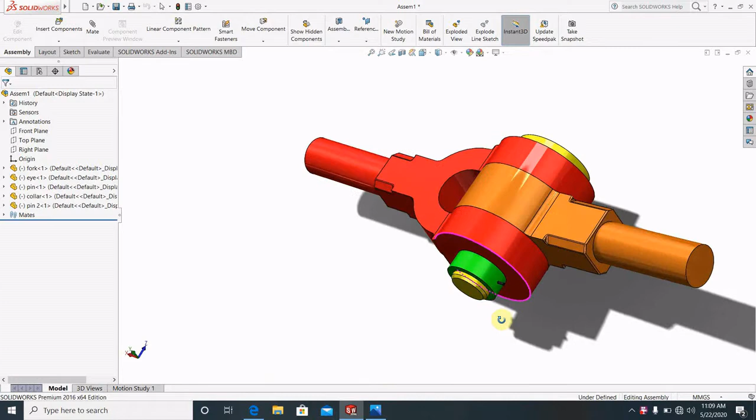This is the assembled view of the knuckle joint. You can see that. Here I am just going to show you how you can assemble these five parts and get its view. So let's go to our topic and make the assembly drawing.

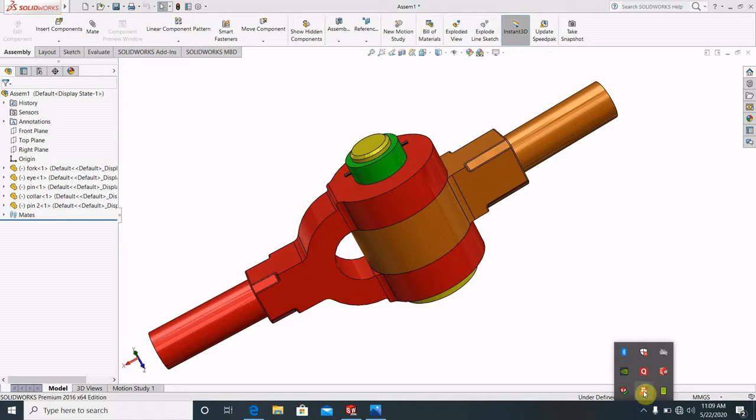When the options window comes, go for document properties and here you can go to image quality and make it higher. Just click here.

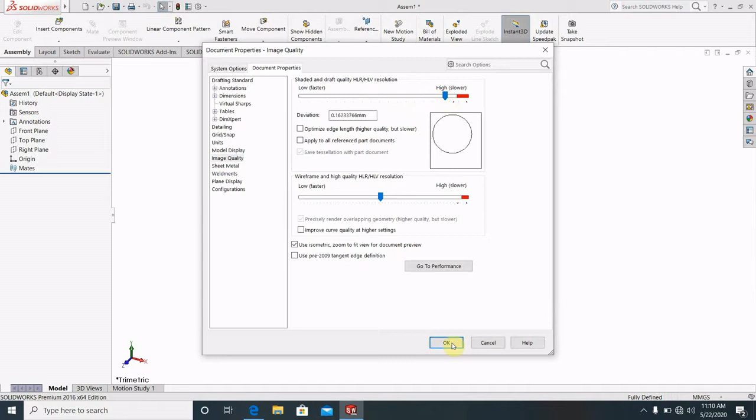When you have done all of this, then go for the insert component option. Here are my five parts, which I have previously designed. If you want the tutorial of the design, comment below, like, share and subscribe this channel.

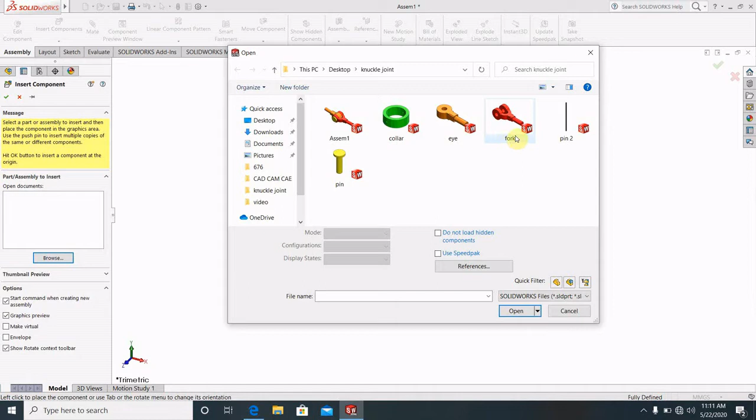At first you have to go for the fork portion. Just click here, you can see the fork portion has opened. Then go for the insert component option again.

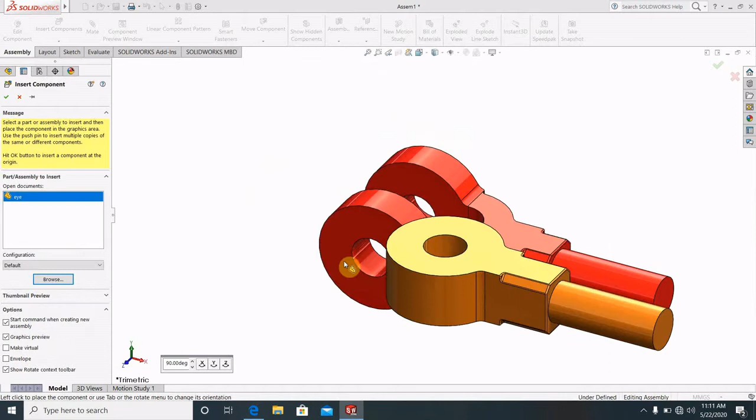Then I will insert this eye portion. You can see this eye portion has come here. Click here to rotate, select this and rotate it, then push it outside.

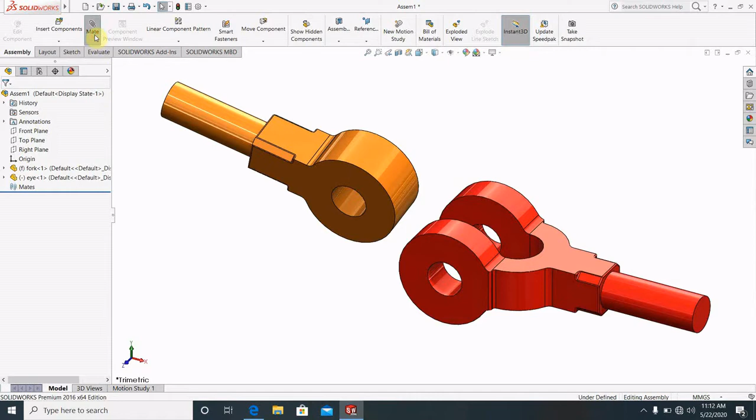Then you have to go for the mate option. Select this portion and this portion and make it concentric. You can just flip-flop this. No problem, just click here.

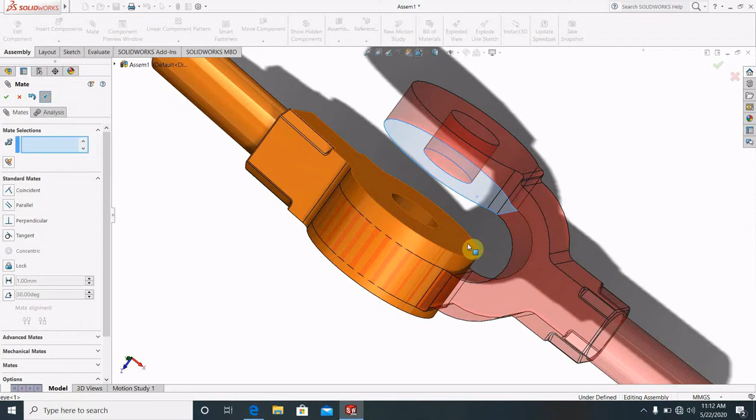When you've done this concentric, you can see this can be slided. Then go for the mate option, select this face and this face, and make it coincident. When you've done that, you can see it can rotate.

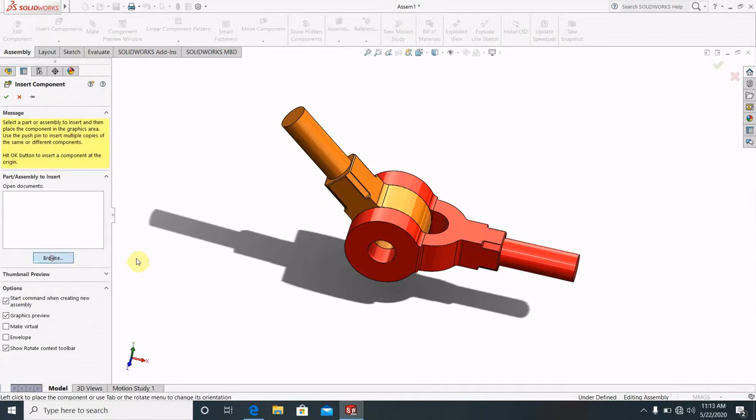When you have made it rotate, go for insert component option again and insert this collar. First you have to insert this pin. You can see I have inserted this pin.

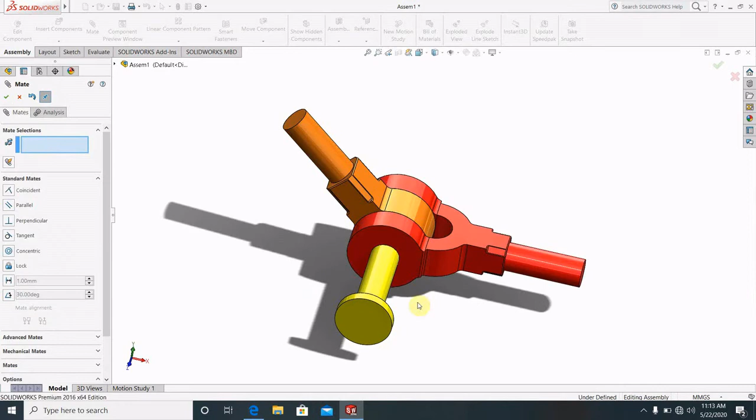Then go for the mate option, select this tunnel and this, select this face, go for mate at first, select this face and this face, make it concentric. You can see it came here.

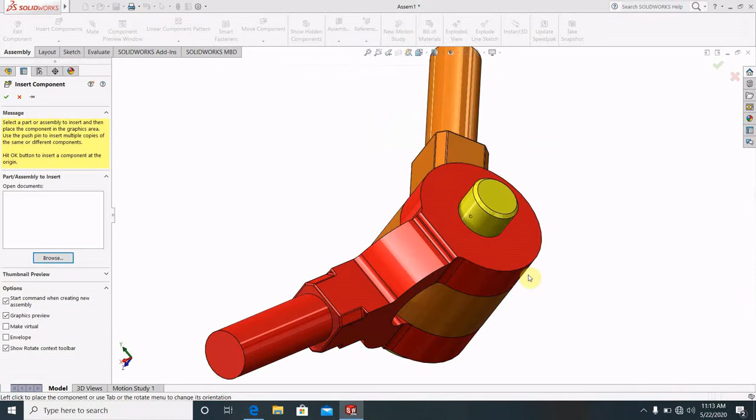Now we have to go for insert component again. I go for browse and insert the collar and this pin, two portions. There are the two portions. First you have to go for the mate option, select this face and this face.

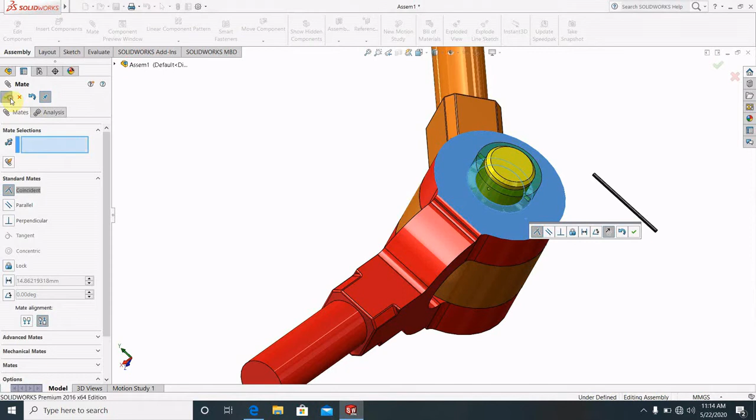Just click here. Then go for the mate option and move this face option, click here. You can see you have done it. When you've done it, select this.

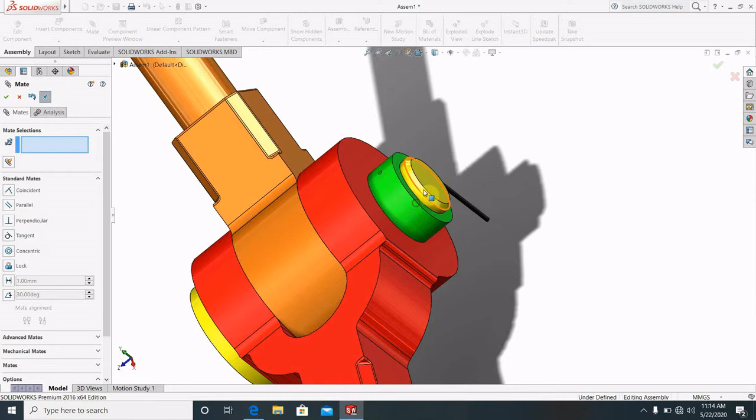When you've done it, you have to mate all this, the inner hole and the outer hole. Just click here. You have previously done this mate concentric, so I have to delete this.

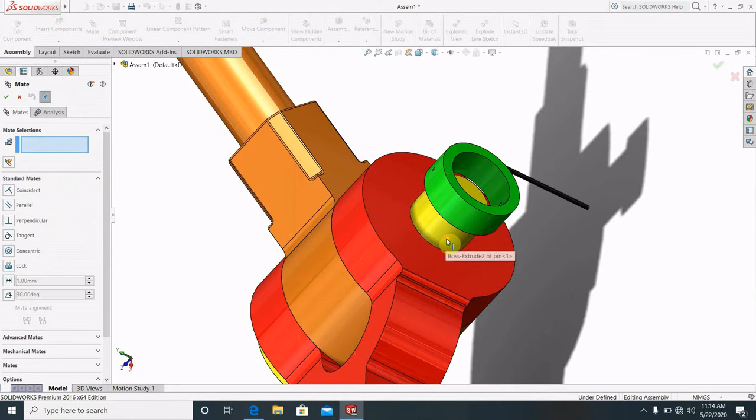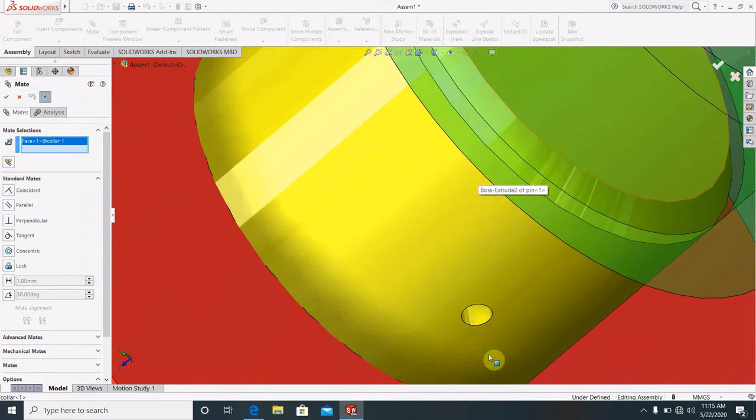Please watch till end. Now we have to go for the mate for this hole, select and select this hole. Go for the mate option, select this hole and select this hole. You can see you have made it.

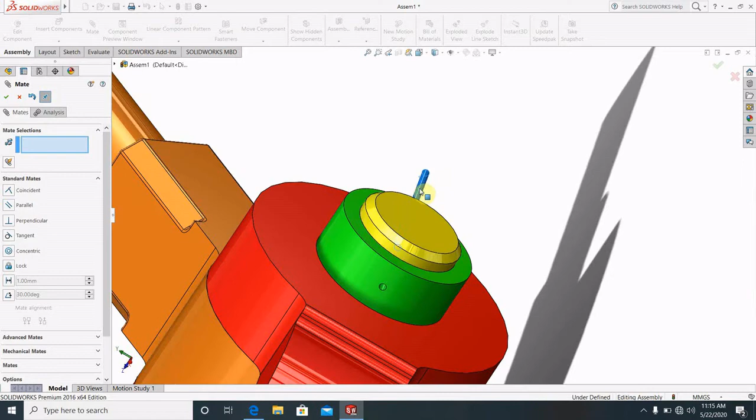When you've made it, go for the mate option again, select this and this, click concentric. When you've made it concentric, push it into this. You can see the pin has successfully inserted.

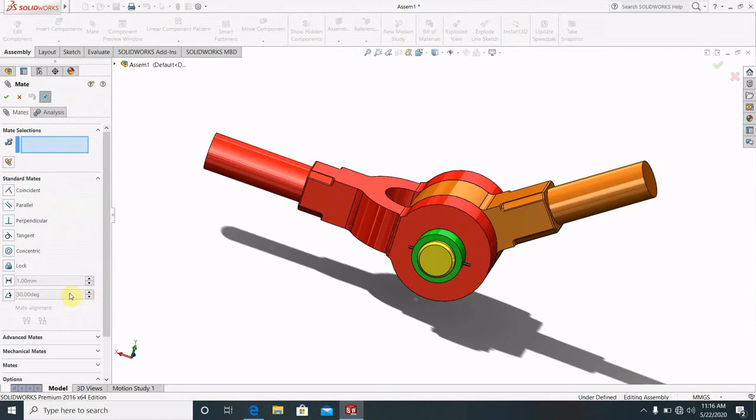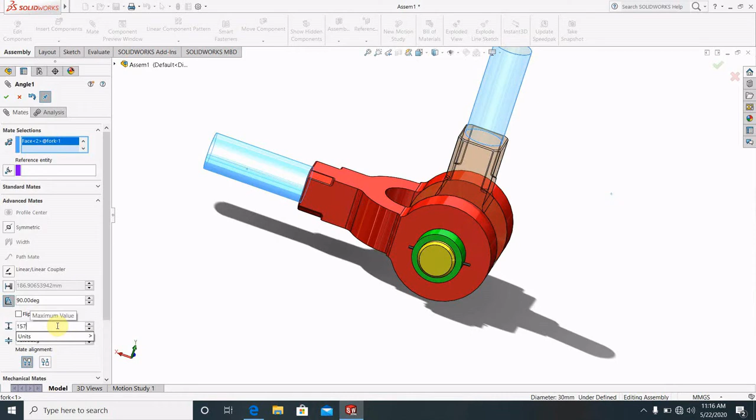Go for the mate option and go for the advanced option. Select this portion and this portion, then go for this angular portion. Select this, make it 90 degrees, flip. Now this distance became 90 and this distance you make it 157 and make it 90. Just click here, I have made a limit so it can't go up to 90.

This is how you can simply make the design and assembly of a knuckle joint.